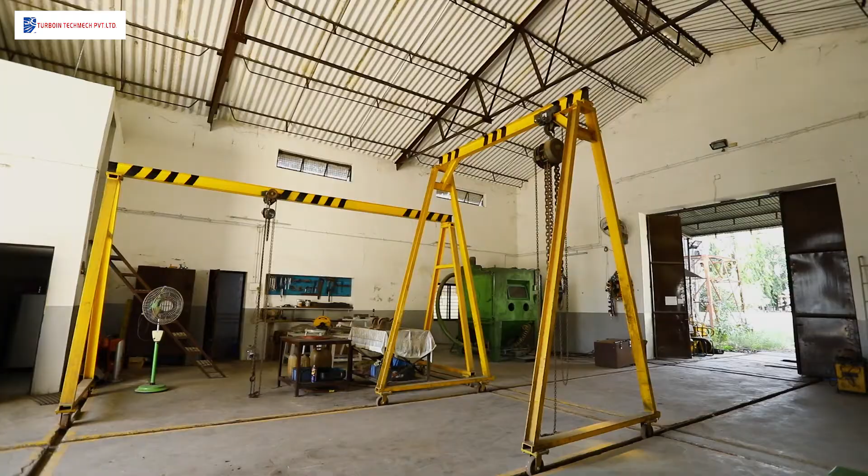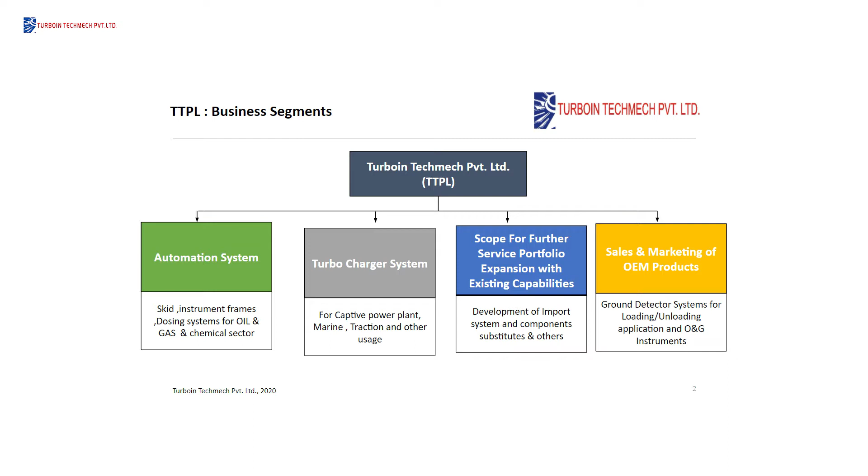We at Turboin Techmech Private Limited are a company incepted in 2005, with massive experience of more than 17 years of Asea Brown Boveri in the field of power, utility and oil and gas sector. We now have various verticals in our organization: automation systems pertaining to the oil and gas sectors, manufacturing various skids and dosing systems and other requirements for the oil and gas area plus chemical and process industries.

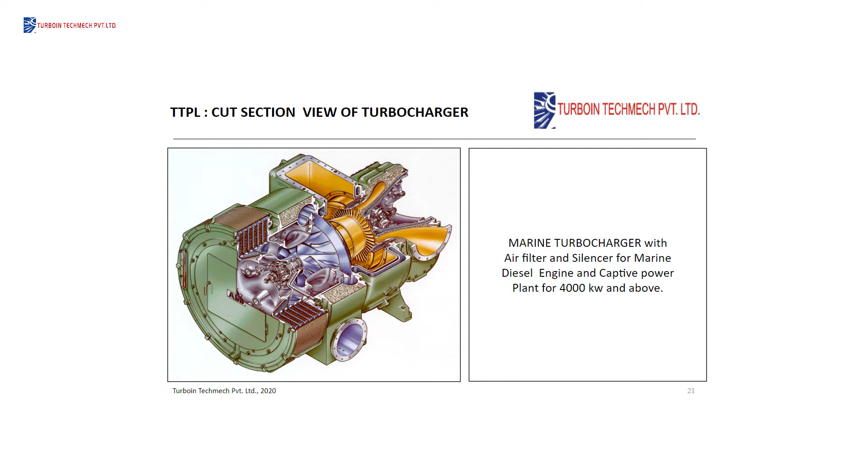Basically, we started this organization with a turbocharger, which is a very key product, and the technology we brought down from Switzerland to India. We serve the oil and gas sector, power plant and captive power plant customers, especially the Indian Oil Corporation, since the last 20 years.

We have a full-fledged workshop of 8,000 square feet area in the GIDC Industrial Estate, Waghodia, District Vadodara. We are equipped with all manufacturing and fabrication facilities pertaining to manufacturing the various skids and instrumentation in our premises. We have been serving IOCL, BPCL, HPCL and various oil companies in the private sector as well.

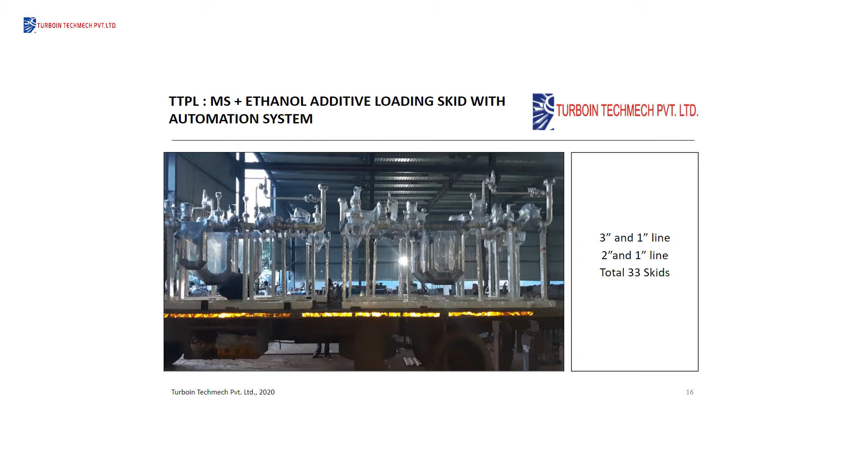We have delivered about 45 or 50 skids to the Indian Oil Corporation in the recent past, and we have exported skids for gas-based locations to Nigeria. We offer services for pipelines from 1 inch to 28 inch for the oil and gas sector, and have served mainly the Indian Oil Corporation as well as various chemical industries, supplying entire pipeline solutions, valves, calibration of systems and all materials pertaining to pipeline division and refinery.

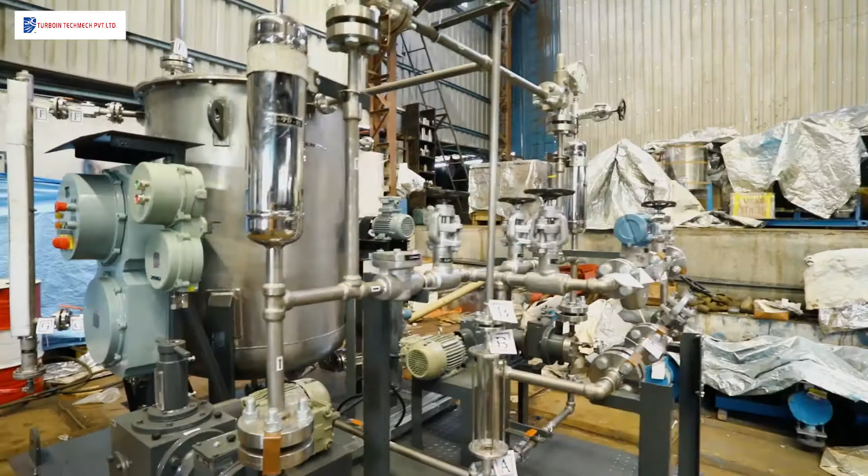With the grace of Almighty, we express our gratitude to the Indian Oil Corporation Limited, especially the South Eastern Region Pipeline Division based at Bhubaneswar, Sambalpur, for awarding us the contract and giving us an opportunity to completely design, develop, manufacture and supply the chemical injection dosing systems for the Sambalpur plant.

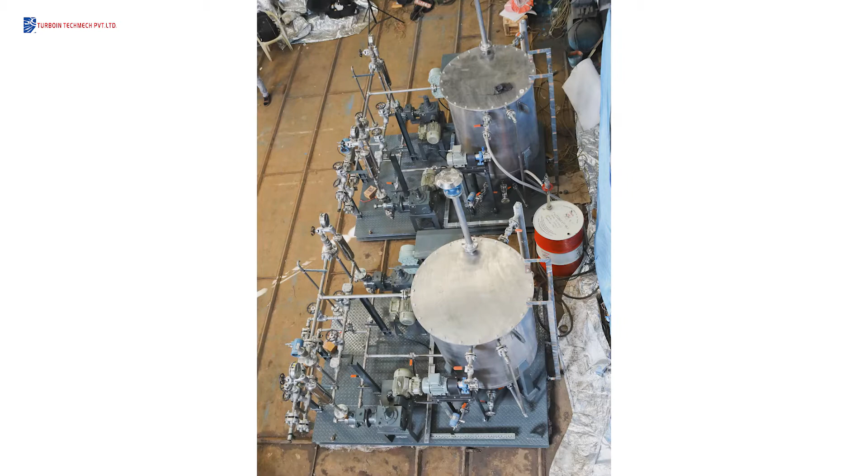We express our gratitude to Indian Oil Corporation Limited, South Eastern Pipeline Division, for giving us an opportunity to be a part of the supply chain for the complete project of the corrosion inhibitor dosing system. The injection system can work with dosing rate adjustment depending upon the mainline flow rate. The system is installed at a product pipeline pumping station to inject corrosion inhibitor liquid into the product pipeline for controlling internal corrosion.

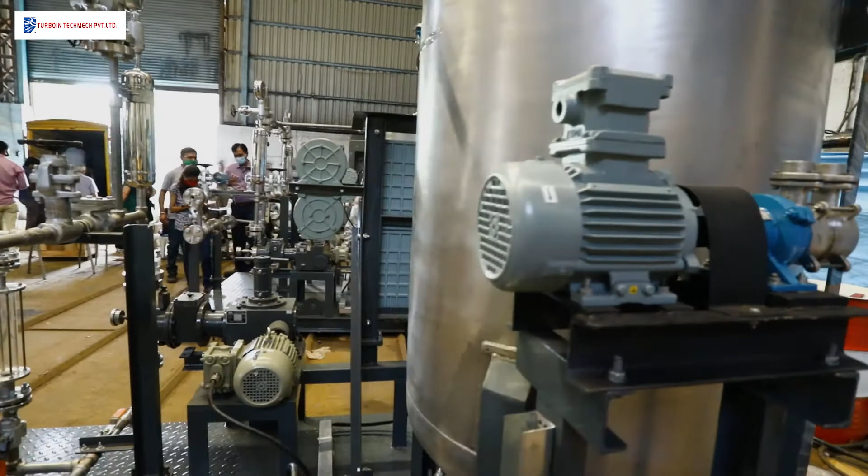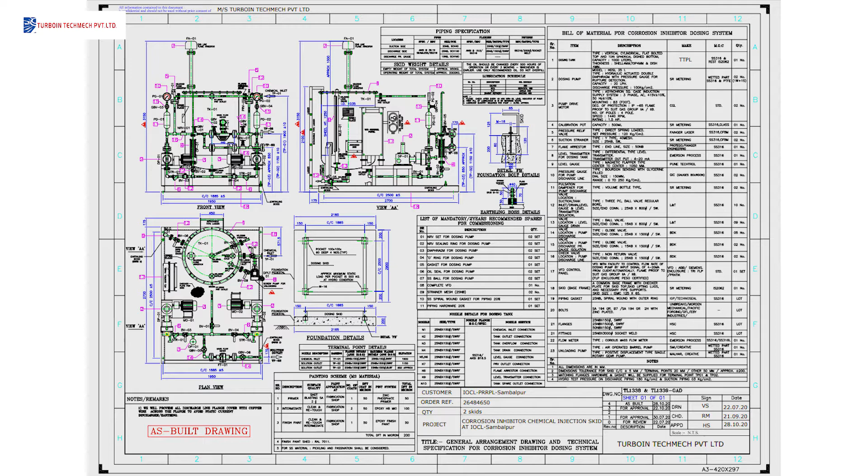The job consists of design, fabrication, supply, installation, erection and commissioning of the corrosion inhibitor chemical injection skid. The approved piping and instrument diagram and general arrangement drawing are enclosed in the manual. These drawings are self-explanatory. Erection and commissioning of skid.

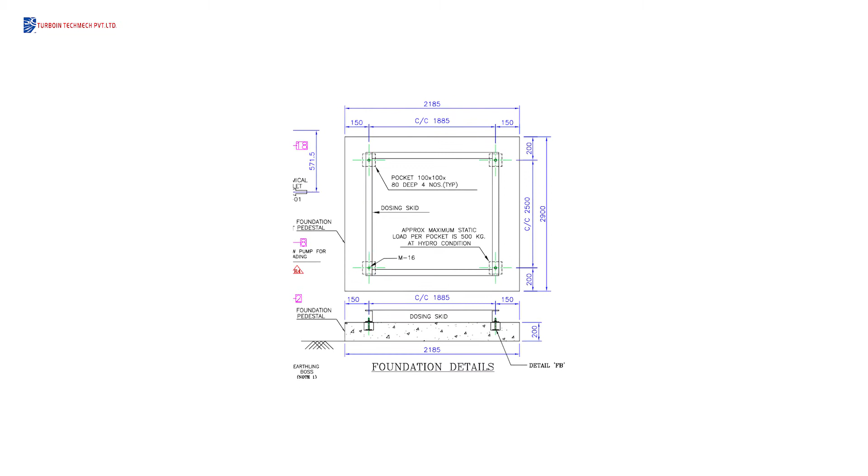The foundation details of the base skid are shown in the GAD section E4, E5. The RCC bed size of 2900 by 2185 by 200 mm depth is to be prepared as per GAD. Four grouting holes at the 4 corners, 4 pockets of 100 by 100 by 80 mm height, are to be provided, and the details of the foundation and RCC pocket are shown under the foundation bolt details at section F4 and F5.

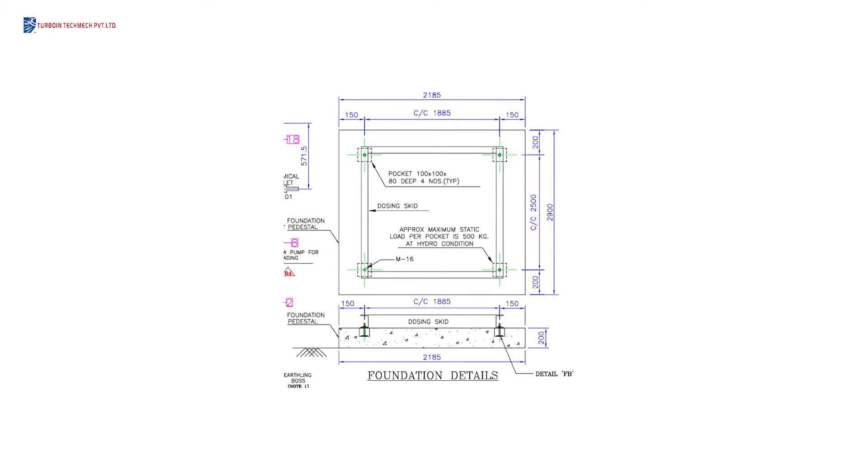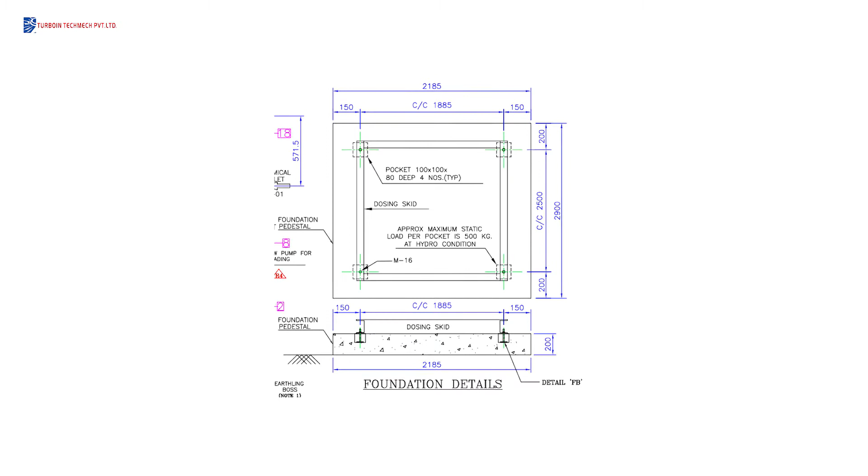The foundation bolts of M16 by 200 mm long are to be grouted for erecting the base skid, shown as per GAD section 8C and 8D. Foundation instruction: the approximate maximum static load per pocket is 500 kg at hydro condition. This is how we have distributed the weight of the entire skid for foundation purposes.

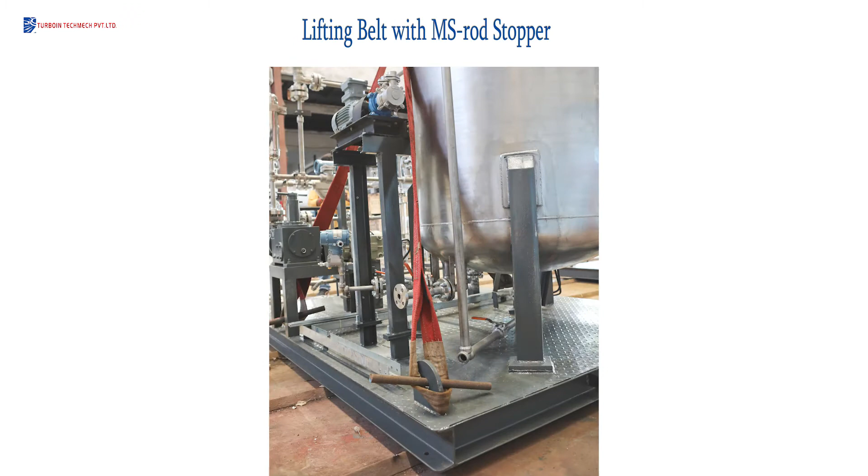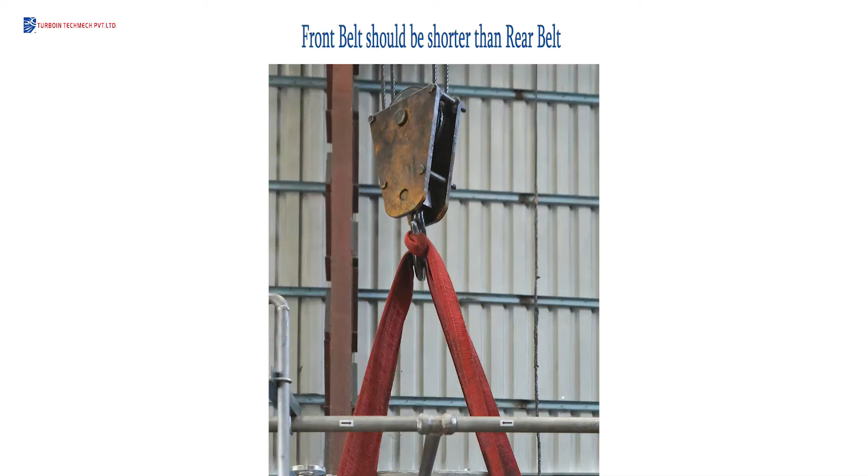Lifting hook. Lifting hooks are provided suitably so you can lift the entire skid and unload it where you want to install it. Please make sure to use calibrated lifting belts, 4 numbers of 1000 kg each. The unloading belt position is shown here so that it can be safely unloaded and erected on the RCC platform.

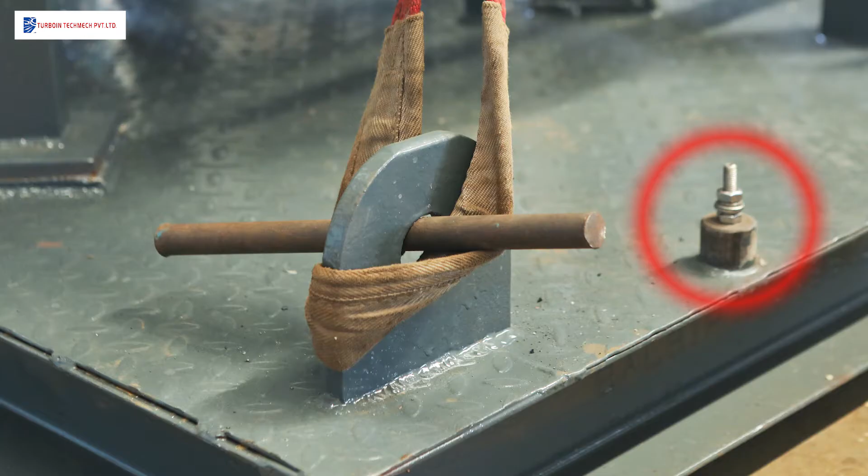Earthing provision. Earthing bolts with nuts and washers are provided for connecting earthing cables. Basic feature of skid: the skid is designed for the purpose shown above, with one complete standby line with a standby dosing pump.

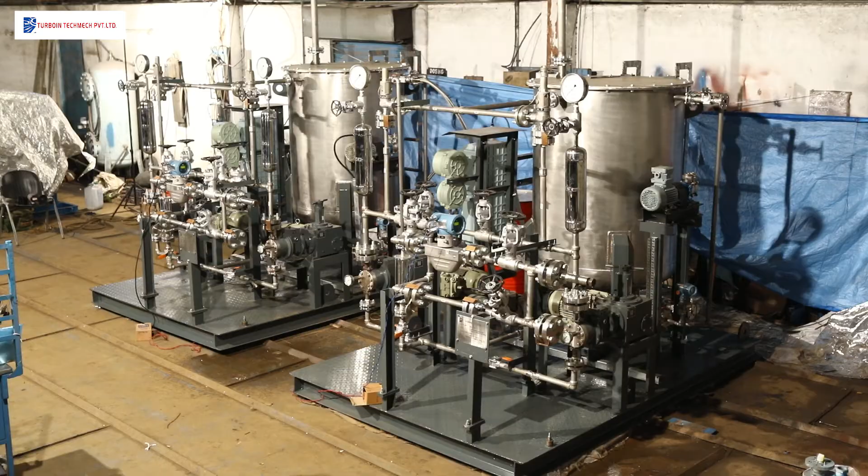There is also a bypass line provided to the mass flow meter. This facilitates maintenance of equipment without interrupting operation of the system.

Nozzle details for dosing tank. We now show you the nozzle connections from N1 to N10 as per the GAD and P&I diagram. Each one is labeled as per the P&I diagram, hence it is self-explanatory.

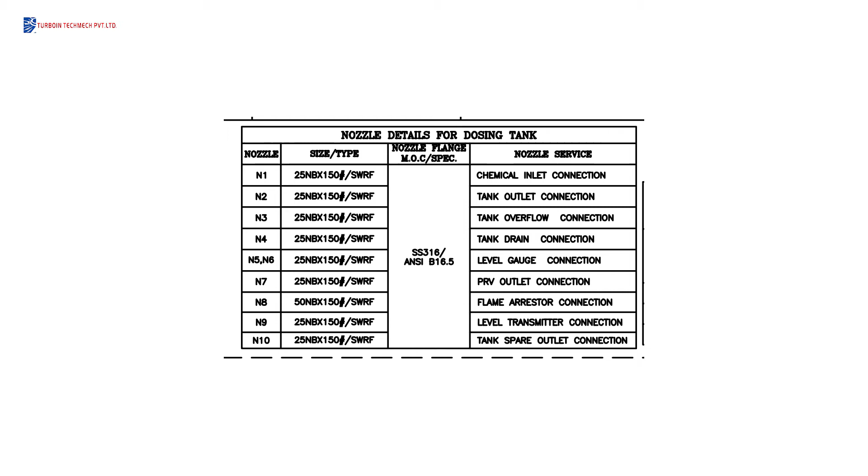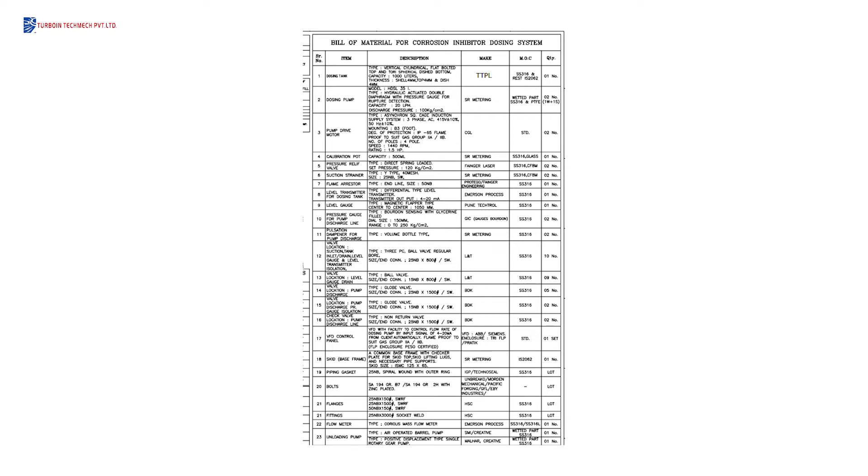Individual components of skid with specification and capacity. Please refer to the GA drawing, table of contents, and bill of materials for the dosing skid. Mandatory spares for commissioning as well as 2 years maintenance spares. Please refer to the GAD and section L of the manual, in which all spares with quantity are listed.

Lubrication aspects of double diaphragm pump. Very important instruction. Recommended lubricant oil for the pump is ISO VG 460 grade. Lubricant quantity required is 3 liters. First oil fill is in our scope. Please check the oil level every 48 hours, or alternate days, as part of a checklist.

Corrosion inhibitor chemical is injected from terminal point 1 to the 1000 liter tank. The chemical from the drum can be filled into this tank by an electric motor driven pump. This pump set is supplied along with the system. I am now showing you the electrically operated pump for filling from a barrel to the tank.

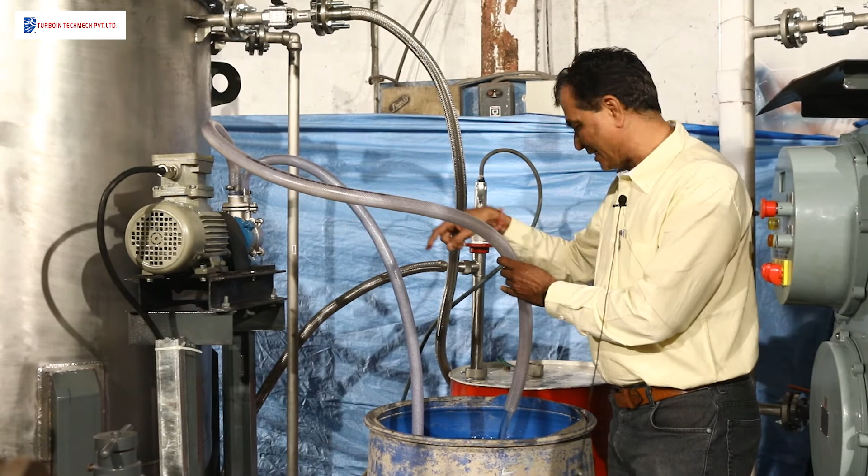This is basically the delivery line. You can see the full flow is coming as per the rated capacity. Now I am lifting up this suction line. Again I am dipping in the suction line here so that the flow is restarted. It means this particular pump is self-priming. Even if water is evacuated from the pipe, it will suck from the suction head and discharge to a level.

If pneumatic air is available, then one can use the pneumatic motor driven barrel pump, which can be mounted in the barrel directly. The flow directions are marked with arrows from the outlet of the tank to the delivery point. The chemical then flows through ball valve 01 to the main suction line. One standby line is provided in the system, including instruments and double diaphragm pump. In case one pump is under maintenance, the flow can be switched over to the standby line.

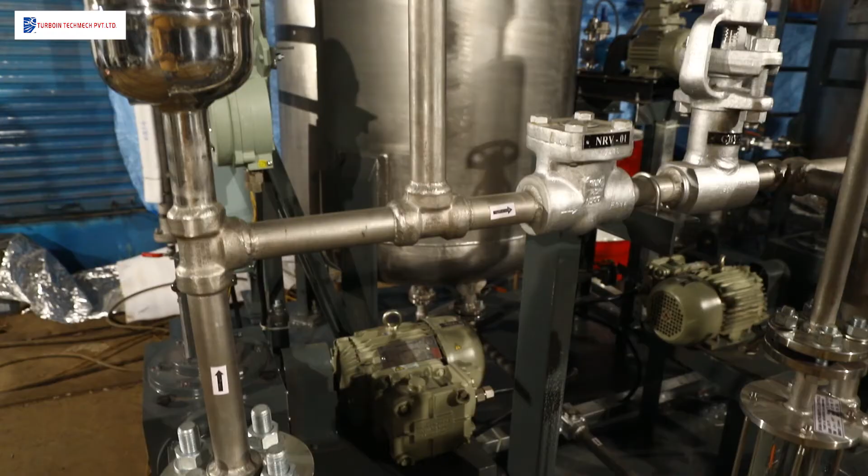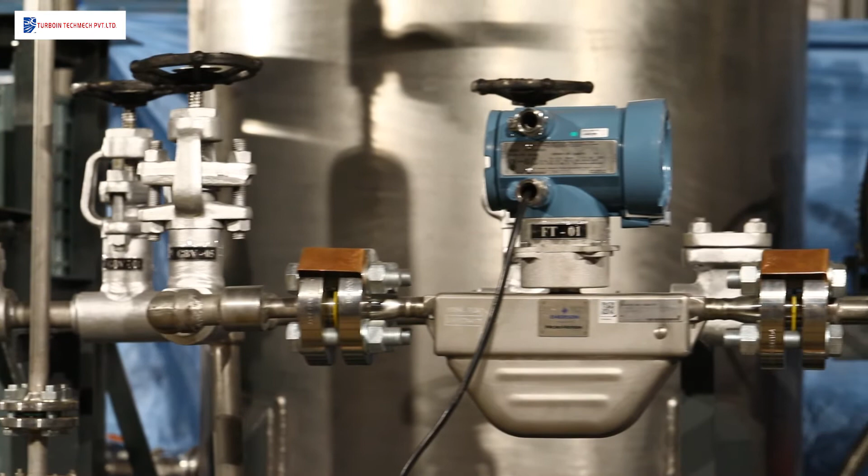Pulse dampener for dampening the vibration and turbulent flow before the pressure gauge reading. Now the pump delivers the required flow from 2 to 20 liters per minute depending on the requirement. After discharge of the pump, all the pipeline and equipment are designed for high pressure and can withstand 100 kg per square centimeter. The pressurized liquid flows towards the mass flow meter, which measures the flow, and then discharges through the NRV to the main line. We have provided a local electric flame proof panel with required indications including an emergency stop button. The details of the control panel electric wiring diagram and GAD are in section C of the manual.

Explanation of control panel. The flame proof control panel is provided for local operation with VFD display. First is the central control panel explanation. Left side indicators. First, control supply on or off. Below that, working pump trip, that is pump 1 trip. Below that, standby pump trip, that is pump 2 trip.

Right side push buttons. Red, emergency stop button for cutting off electric supply to the system. Green push button, starting of pump. Yellow push button, raise the motor RPM of the pump through VFD. Blue push button, lower the motor RPM of the pump through VFD. Selector switches. Left switch: by turning to the left, the supply to the control panel is on.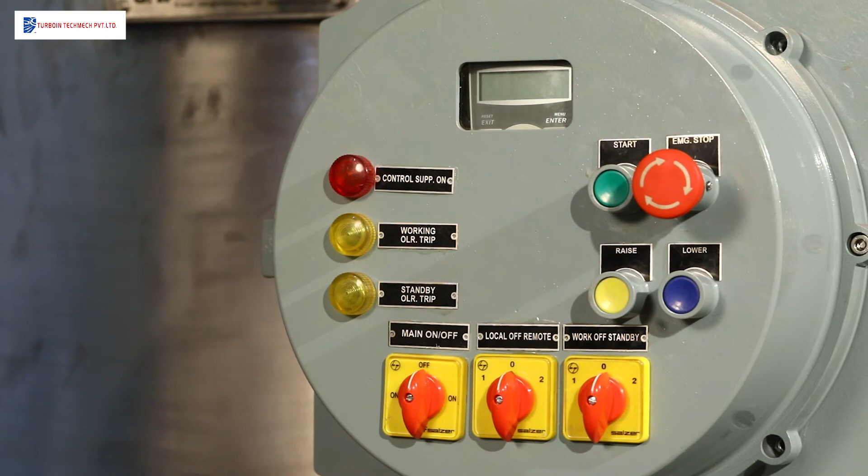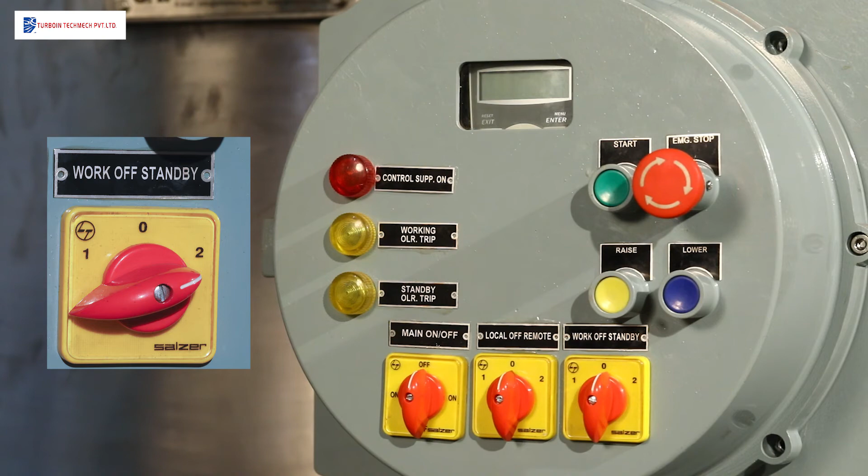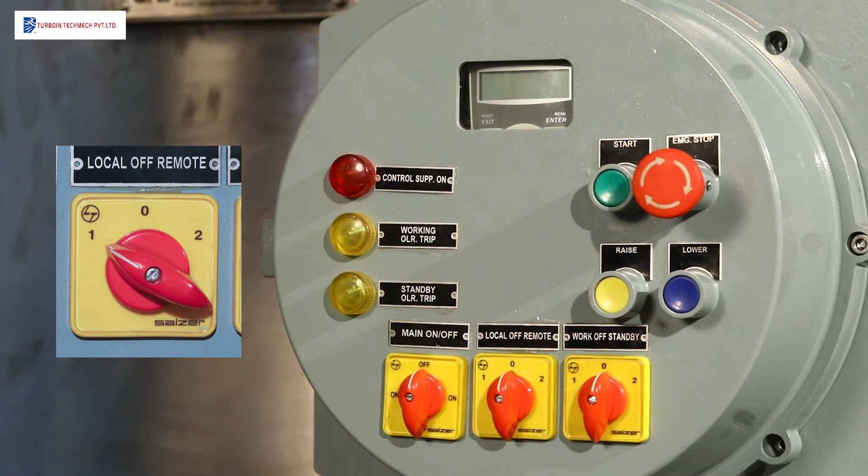Right switch. Selector switch at position 1 to start pump 1, that is the left pump motor. Selector switch at position 2 to start pump 2, that is the right pump motor. Center switch: local means you are controlling the flow of the pump manually through the local control panel. Remote means one can control the flow of the pump through an input signal to the system through a remote control panel.

The right control panel is a flame proof DOL starter for the inlet electric gear pump for filling the chemical from the barrel to the tank. There is an on and off switch provided on the panel.

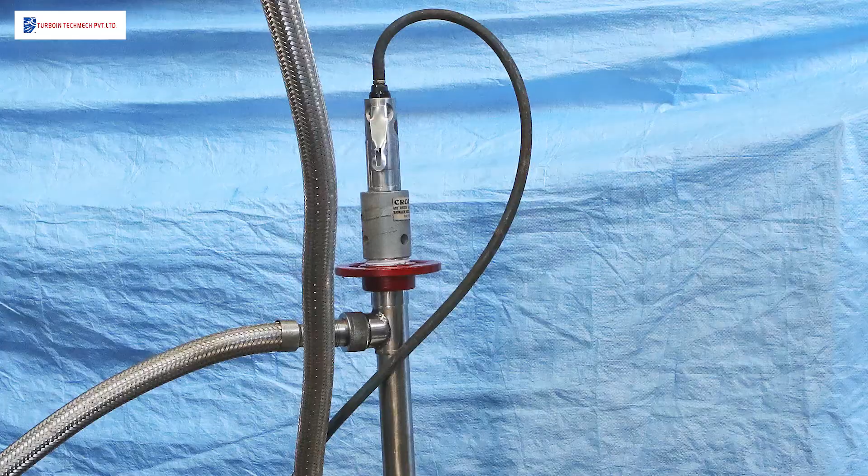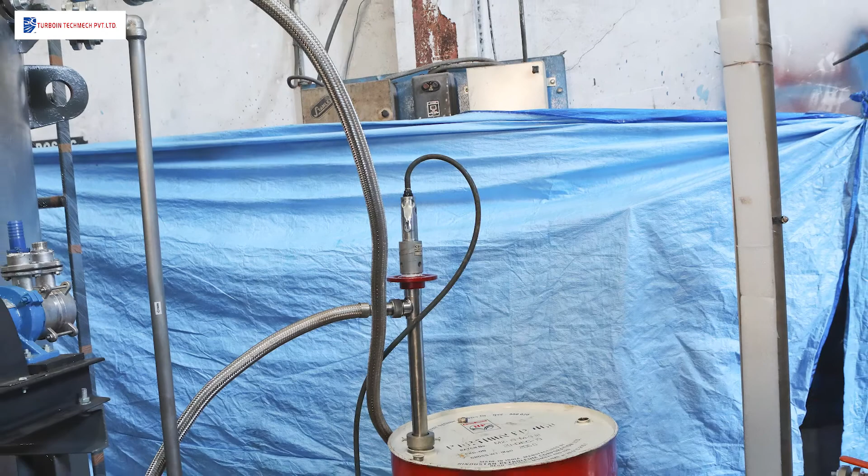Pneumatic barrel mounted pumps are also supplied, which can be run with a supply of constant 5 to 7 bar dry pressurized air connected to the air motor of the pump. After pressing the lever, the pump starts and sucks the liquid from the barrel, and through the discharge hose it will transfer to the storage tank.

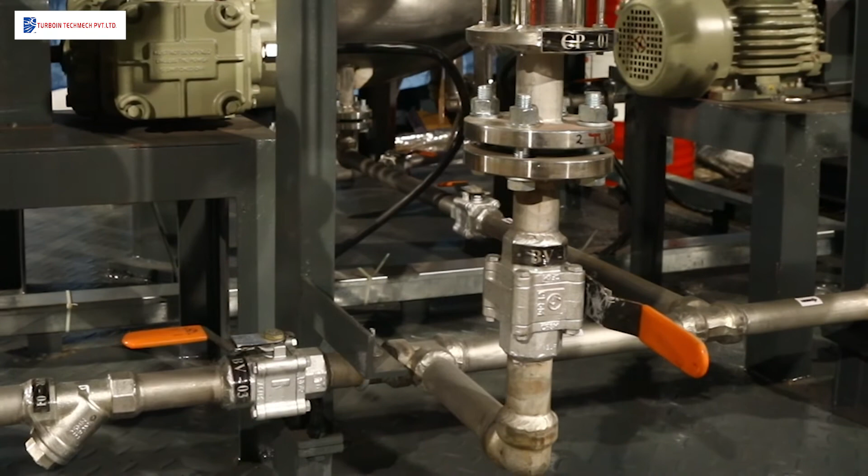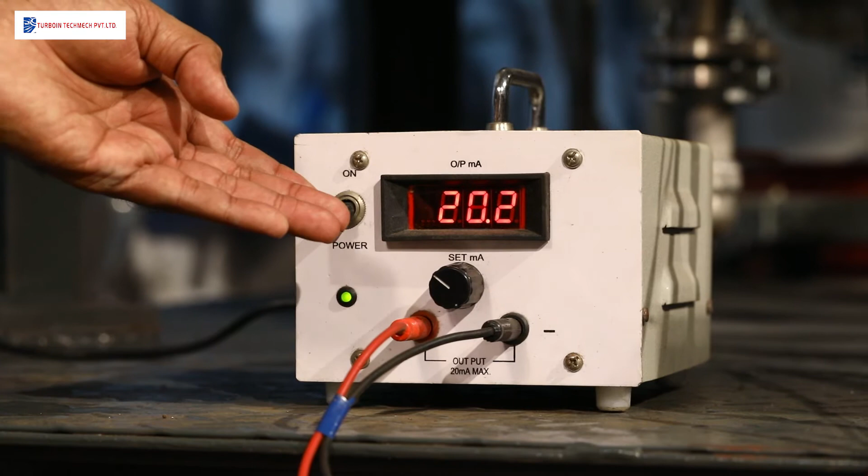Actual operation key points. Caution: please make sure that all the inline flow valves from inlet to the pump and discharge to the terminal point TP02 remain open to avoid back pressure to the pump or dry run condition of the pump. Based on input signal from the main control room, panel input signal in the form of 4 to 20 mA depending on the flow of the main line is fed to the local control panel of the system.

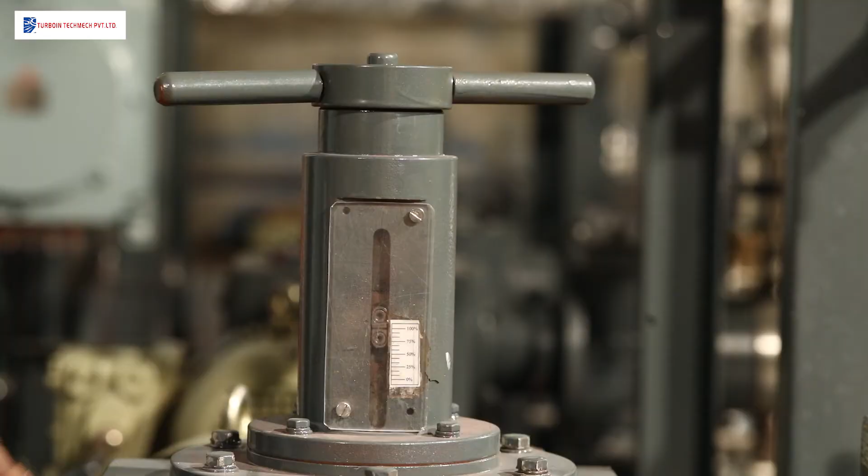To adjust the flow of chemical from the tank, there are two options available. A. Local operation mode. One can vary the flow through the spring operated lever provided on the top of the pump, which can vary the flow from 25 to 100%, to be set depending on the mixture ratio required in terms of ppm. After defining the mixture ratio, one can adjust the flow manually as shown here.

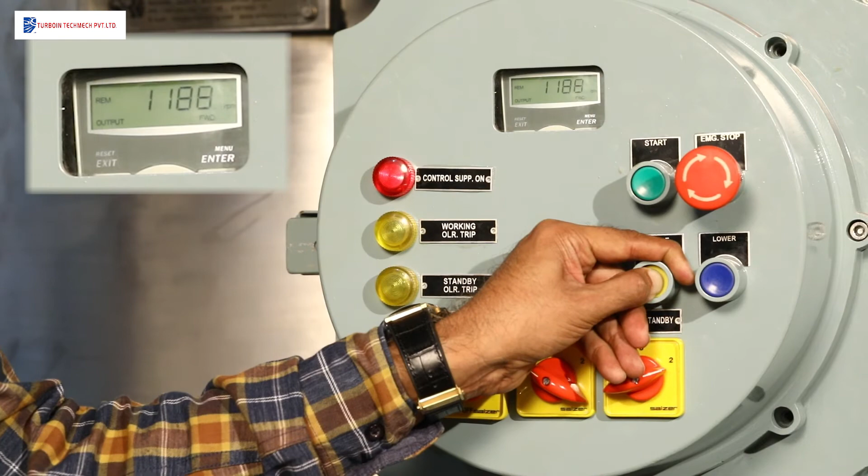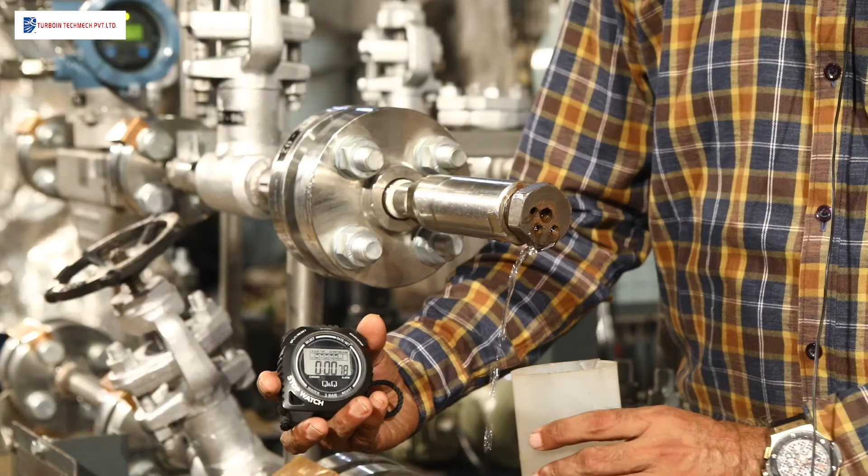B. Auto operation. One can vary the flow through VFD, which in turn varies the speed of the motor, resulting in variation of pump RPM and discharge of chemical into the system. Both skids are tested by input signal of 4 to 20 mA and variation in flow is measured physically. The actual measured liquid at the discharge terminal is compared with the mass flow meter. It shows the result as per desired calibration with defined accuracy of the mass flow meter.

This liquid at level of 193 milliliter corresponds to a flow of 22.7 or 23.1 liter per hour. Please note that the discharge pressure remains at 100 bar in all variation of flow. Caution: please note that after setting pump RPM either manually or through VFD, one needs to wait for some time to develop the pressure at 100 bar through throttling effect from the discharge line.

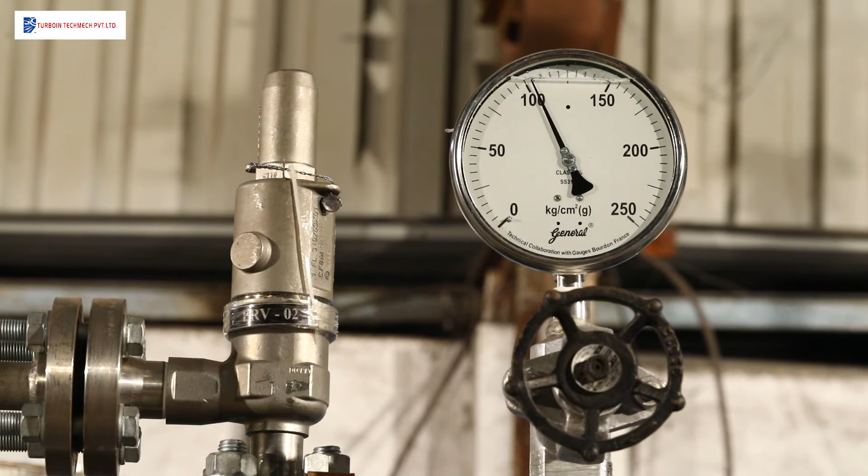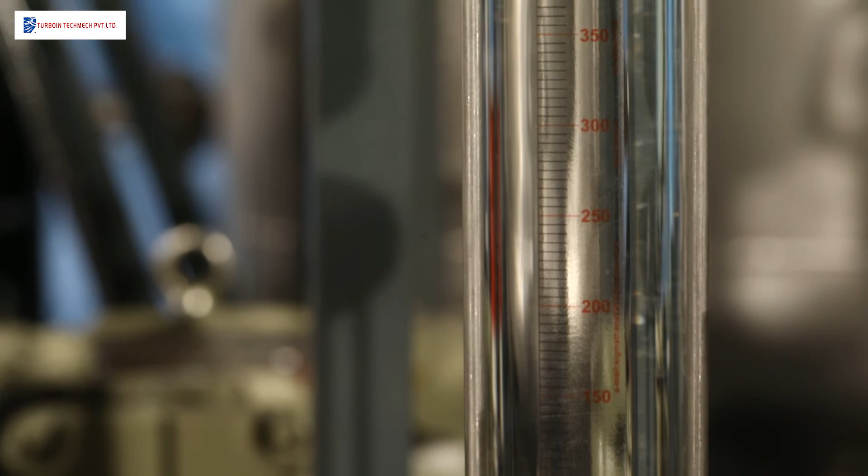Once the pressure is set as per the desired flow level, then pressure remains constant for discharge of liquid or chemical. The calibration port is also provided in case the mass flow meter is under maintenance, hence one can adjust the flow manually. The capacity of the calibration port is up to 500 ml.

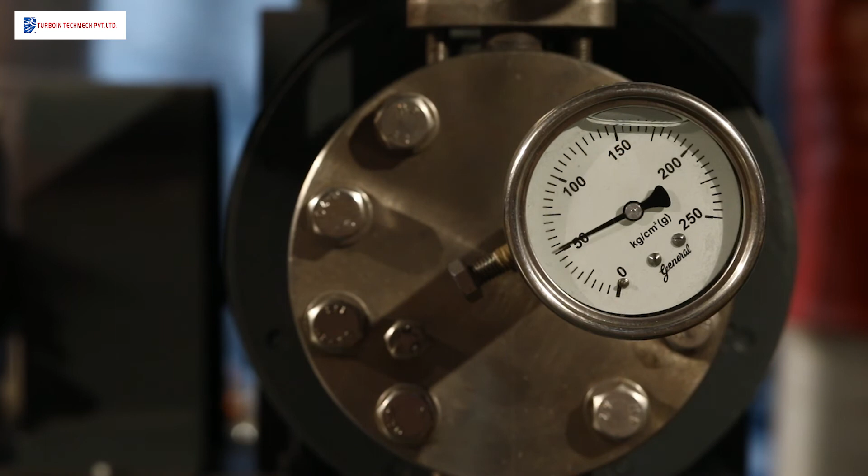Important aspects of double diaphragm pumps are: if one diaphragm is ruptured, then the second diaphragm is in action and still delivers the liquid output. A pressure gauge is provided which indicates the normal working pressure. If the diaphragm ruptures, then the pressure shoots to the maximum limit of the local pressure gauge. This being a local observation, one must note the reading regularly in the logbook. Any abnormal deviation in the reading indicates something wrong with the pump.

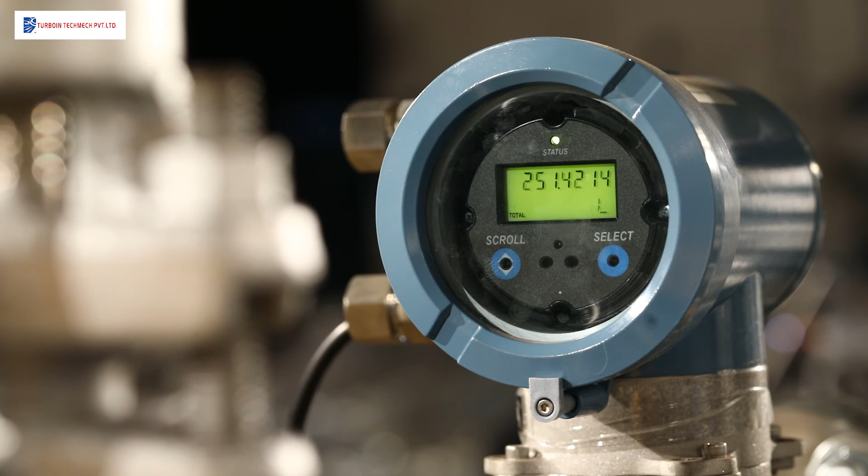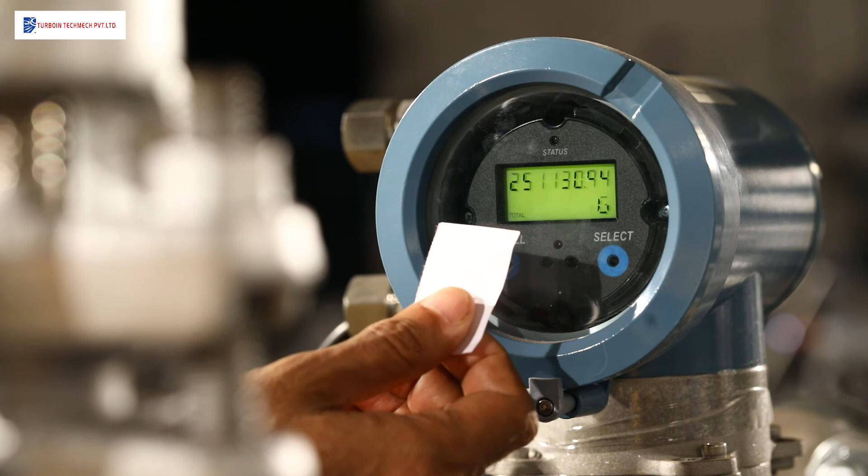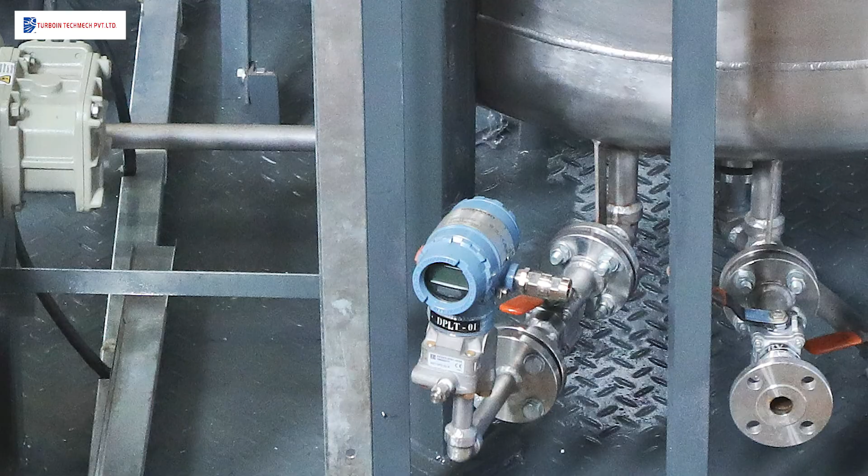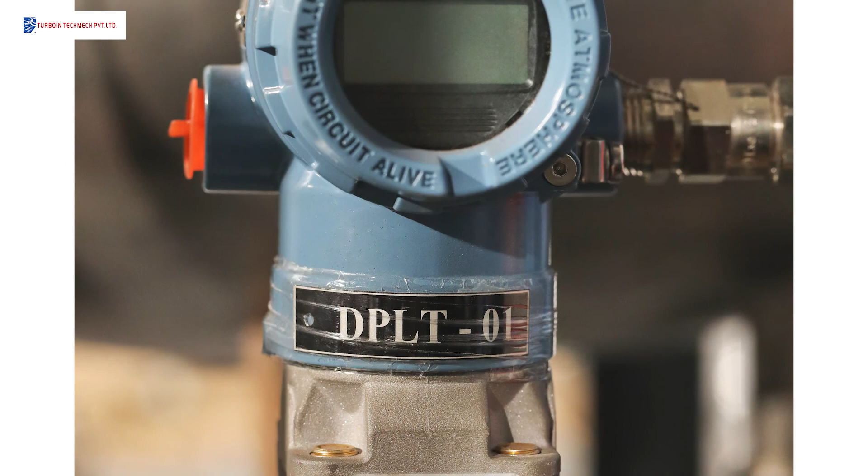Differential pressure level transmitter. It is provided at the bottom of the tank and the terminal point. This can also give the signal of liquid in the tank, and its output signal can be connected to the main control panel. Maintenance spares. The list is given in the O&M manual. Please note that one entire VFD is provided as spare in order to replace it in case of any problem with the existing VFD.